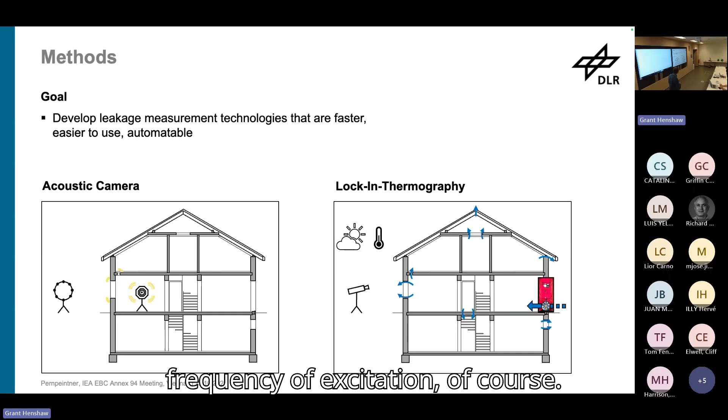First thing we found out was that the sound was also going directly through the walls. So we had to do some soundproofing with some foam material. So after that, we reached significantly higher sensitivity there.

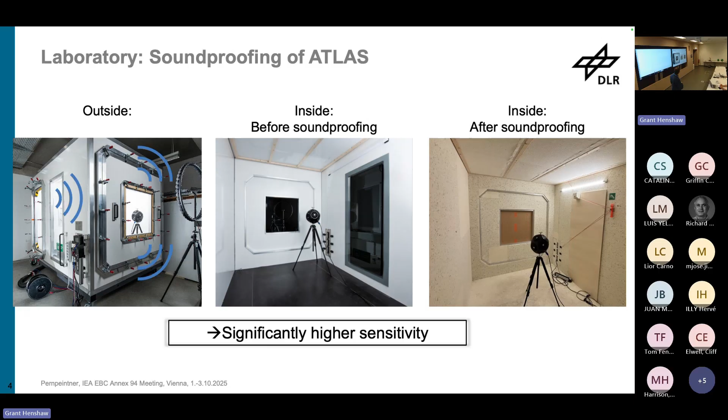One of the first questions we investigated with the acoustic camera was, can the sound really go around corners? What if we have cavities in there? So we investigated two kinds of specimens here, a labyrinth system and a sandwich system. Both are made of back plates from wood and some acrylic glass cover plates.

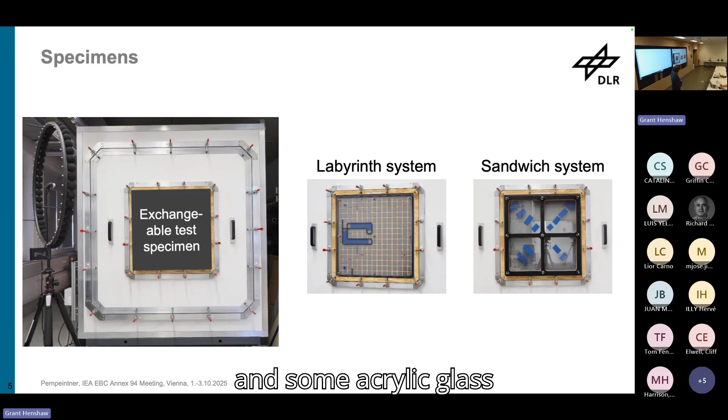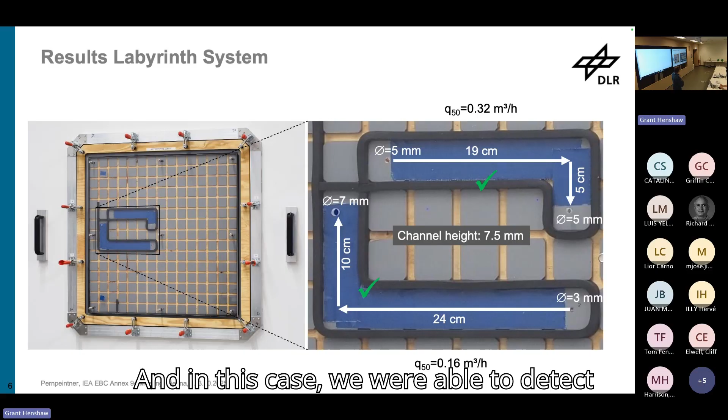So this is one example with a labyrinth specimen. To the back, there's a hole with diameter 5 millimeter. We also have smaller holes or bigger holes. And then we checked if we can still see the leak. And in this case, we were able to detect both leakages.

And then we switched to smaller holes with 3 millimeter diameter. The other hole was 7 millimeter. We could still detect that one. But then we made the labyrinth a little bit longer, and then that was over the edge. So this is about the sensitivity we can reach here.

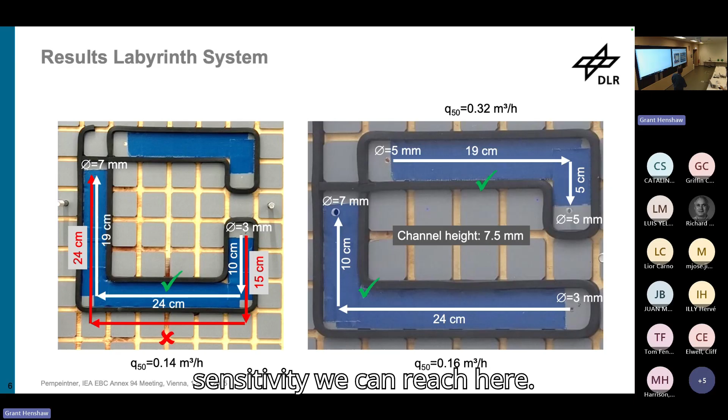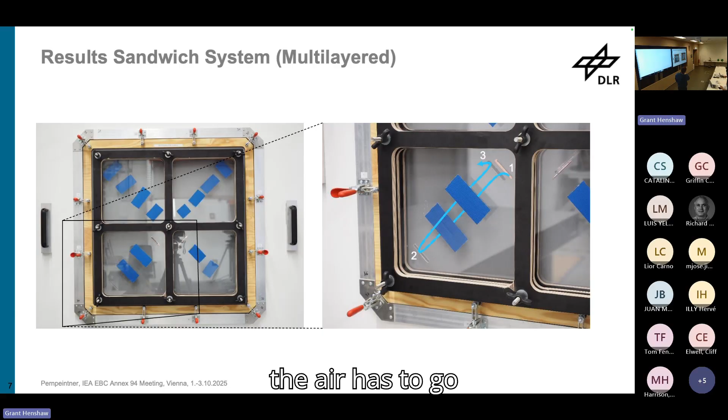So this was a sandwich system. Basically, we have several acrylic plates behind each other. And we have openings in form of slits. So the air has to go this loop path. So in this case, we were able to detect the leakage if we have a slit of 7 millimeters width, also 3 millimeters width.

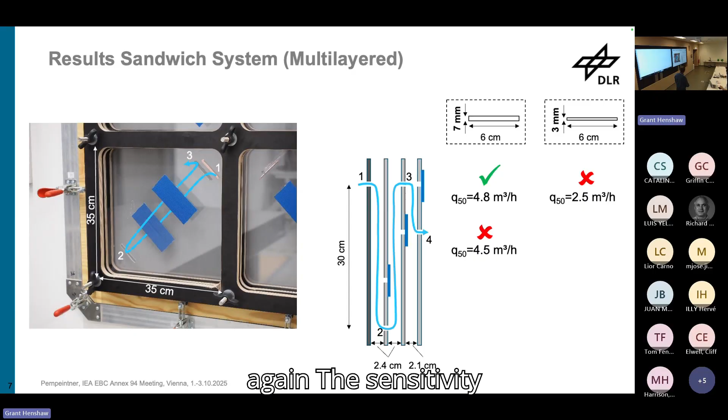So we went a little bit further, added another plate there. With 7 millimeter, we were still able to detect that. With 3 millimeters, not anymore. So with 7 millimeter, we went a little bit further, and that was again the sensitivity that we could reach there.

Okay, we also did some measurements with the lock-in measurement system. There, we wanted to investigate if inverting the pressure would also give us some additional benefits. So we started out with just switching on and off the fan. So we only worked in pressurized and zero pressure. Then we went to an inverted system where we pressurized and depressurized.

So the idea came from the question whether with the stack effect we would have some pressure bias, and maybe this will create some problems there. On the other hand, one would expect a factor 2 improvement of the signal, which is always good, without having to increase the pressure.

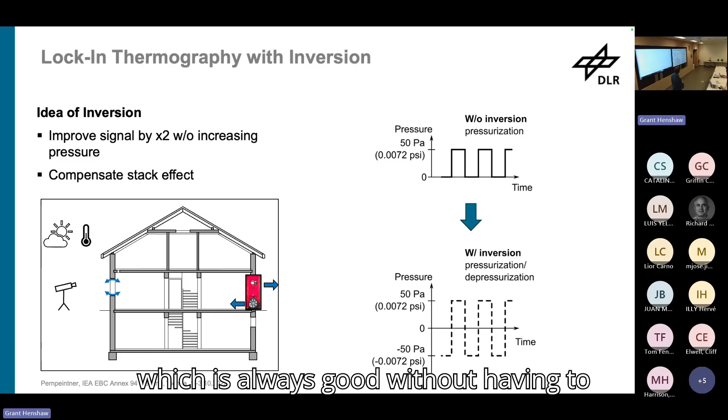So we did a small study here. In that case, we had the fan running continuously, creating a pressure of 50 Pascal. We had a valve switching system that was able to switch the pressure quite quickly. Temperature difference 10 Kelvin. Infrared camera was running at 2 Hertz. We investigated 3 periods, 10 seconds, 40 seconds, and 160 seconds. So, for example, the 10-second period is 5 seconds pressurized, 5 seconds depressurized.

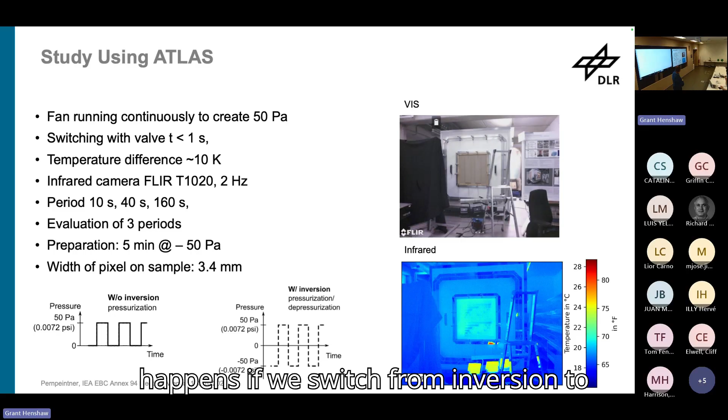Always evaluated 3 periods. All the measurements were preceded by a preparation time of 5 minutes depressurization. For your information, the camera was about 4 meters in distance. So with the optics, 1 pixel is 3.4 millimeters. So the main idea was to compare what happens if we switch from inversion to without inversion.

The specimens we investigated were Z channels. The material was medium density fiberboard. Basically, it's 2 boards screwed together. In one board were holes, in the other channels and the hole. So the air does a Z-form path with diameters 3 to 8 millimeters and length up to 500 millimeters.

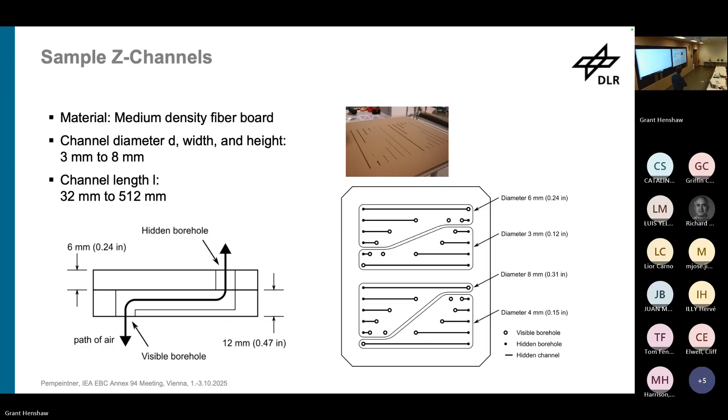For the evaluation, down on the left-hand side you see the amplitude image. Already we have to zoom in a little bit. We see in the amplitude the boreholes with the end of the Z channel. In order to compare the amplitude to the noise, we also evaluated 500 pixels to do some statistics. So we determined the threshold where 66 to 95% of the amplitudes were below that. So this should be the threshold of detection.

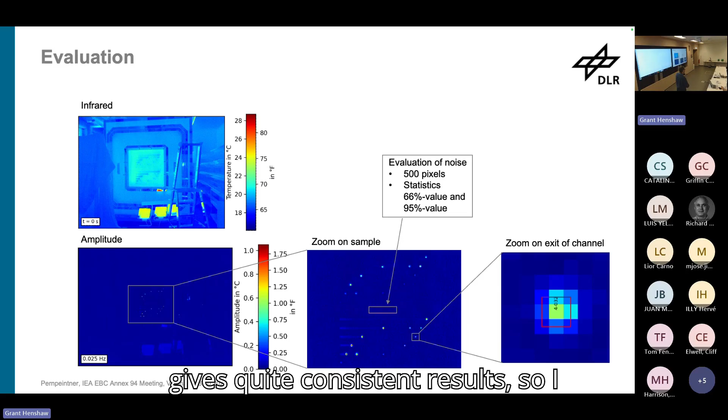If we zoom in even further, we chose the pixel with the highest value. Usually in infrared temperature measurements, you say you would need at least 3 pixels. We went below that because we want to go to the edge of detection. But if you compare only same with same, I think it's okay. It would increase the noise in the graph there. But the graphs give quite consistent results, so I don't think this is a big problem here.

So here are some selected results. On the left-hand side, you see the amplitude of the detected temperature variation plotted versus the period of excitation. In that case, for a channel of 32 millimeters in length, the dashed lines are always with inversion, the solid lines are without inversion. And of course, you see with increasing period, the amplitude also increases, but waiting much longer doesn't really increase the amplitude that much.

What's quite interesting is that the signal increases by about factor 2.4. So it's even more than 2 times the signal in average of all these measurements. So if you want to do a quick measurement, do the inversion, and it's much better than waiting a long time for long periods. A very similar result we see with the long channels. You also see the dotted line, which is the noise. So for almost all of the measurements, we were above the noise level.

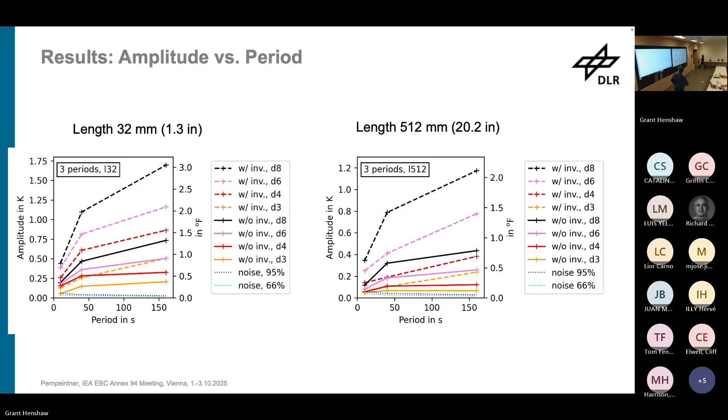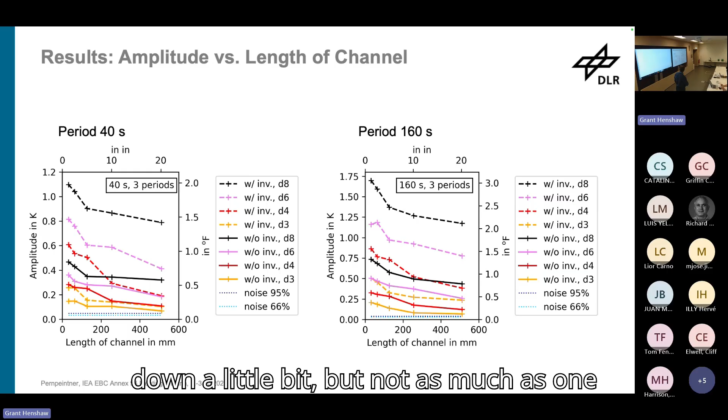Here are the plots, amplitude versus length of channel. I was afraid that with the longer channel, we might lose the signal and might not see anything. Interestingly, with a channel length of 0.5 meter, in almost all of the channel types we investigated, we could still see a significant signal, although it went down a little bit, but not as much as one might expect.

Okay, so conclusions. We did some first measurements with the acoustic system and the lock-in measurement. We could show that complex leakage paths were able to be detected with the acoustic camera. For the acoustic camera, the next steps will be, we want to work further on suppressing interference signals and increase the automation.

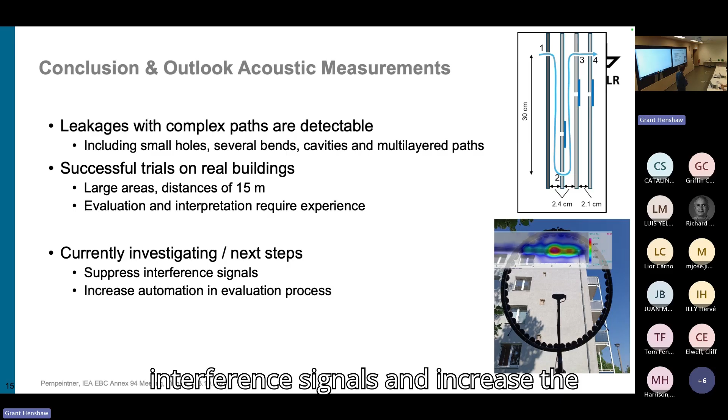And for the lock-in thermography, next steps will be, we want to develop a live tool, so we don't have to run an evaluation script, and we also want to do more complex mockups.